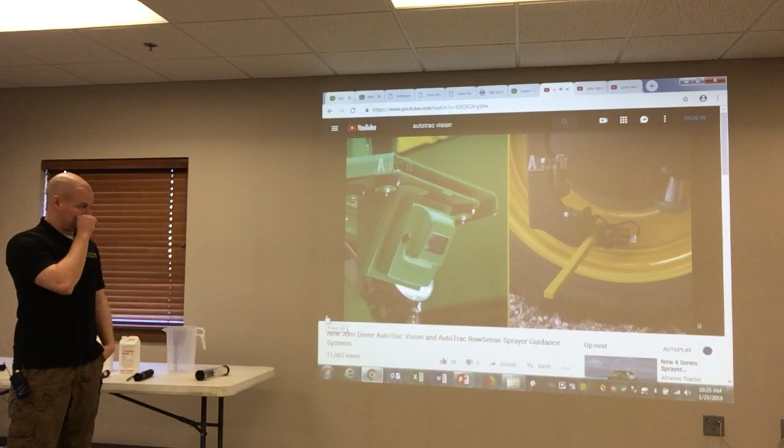Today, we're introducing 2 highly productive additions to the Precision Ag product portfolio: AutoTrac Vision and AutoTrac RowSense guidance solutions for our 4 Series sprayer line. Designed specifically for post-emerge row crops, these new guidance systems allow operators to drive faster compared to manual steering in straight rows. Just by increasing spray speeds by 3 to 4 miles per hour, an ag service provider could add up to $1,200 in revenue per day. That's because AutoTrac hands-free steering helps the sprayer stay on track without taking out plants or wearing out your operator. In fact, we've taken all the advantages you already appreciate and further optimized this popular guidance product for use in post-emerge row crops, including corn, soybeans, and cotton. Our industry-exclusive AutoTrac Vision system uses a frame-mounted camera to see early season crop rows.

With a paddle sensor mounted on the sprayer's front wheels, AutoTrac RowSense can feel the corn stalks in late season rows. Both systems send these input adjustments to AutoTrac, helping the sprayer wheel stay in the center of the row, preventing crop damage.

Operators can have confidence in AutoTrac when following standing row crops, even if planter drift causes misalignment or the AB line from planting isn't available at spraying. Best of all, this industry-leading technology helps boost productivity with faster possible operating speeds and by reducing operator fatigue from manual steering in straight rows.

What's more, these post-emerge row crop guidance solutions help sprayer operators of all experience levels do a higher quality job because they can concentrate on other critical tasks besides steering. Let's further explore how you can improve productivity and quality for your operation.

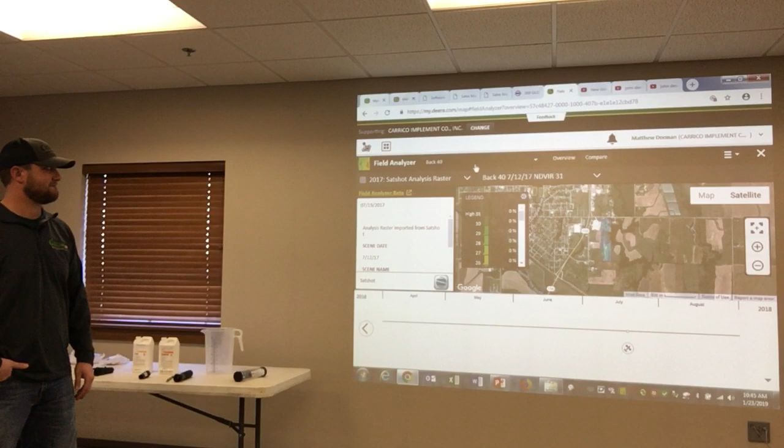So like Connor said, I know this is not the first time you've heard us talk about data or Operations Center or anything like that. And it won't be the last time either, because we feel, we know, we see the product of what happens if you follow through with recording some of this data and use it. What is usable data? To different people, that means different things.

It depends on where you want to go with your operation, what your plans are as far as if you want to use the technology or equipment you've already purchased to the full extent, or you just like some of the creature comforts of it, some of the things that make your life easier. That's fine.

But our job is to make you aware of what your equipment is capable of. And some people don't understand what all it's capable of that you've already paid for.

So we talked to you about harvest data and what you can do with the yield map going forward, make a variable rate prescription for your fertilizer, for your seed, stuff like that. So that's one aspect of it.

Your planting data, your seed guy is going to want you to record, because they want to be able to look back and see what populations you planted, what varieties in certain areas when they go out. Maybe it's your seed guy, maybe it's your agronomist. But we're here for a sprayer clinic, and I want to talk to you about a different aspect of documentation.

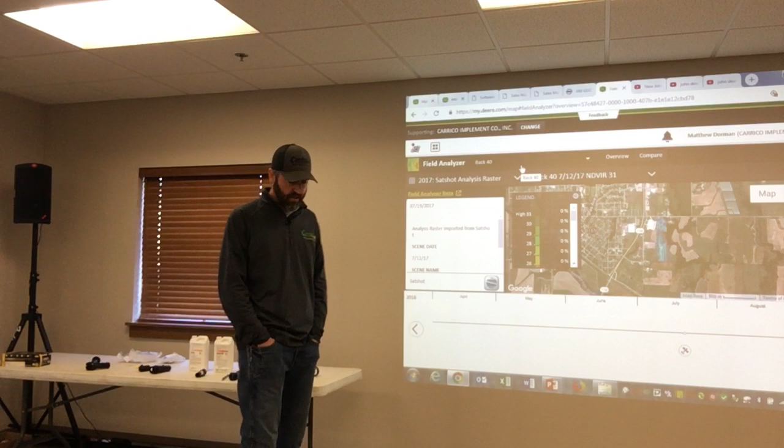This is strictly just to hold your data, share it with who you want to, and analyze whatever you have recorded. JD Link is on sale for $200 with the subscription for a little while. We also have a 4G MTG, the cellular modem in your sprayer, combine, or tractor that sends this data out. There's a deal right now where you can upgrade to a 4G for about $400, and that includes a year subscription. So you get a new MTG and a subscription.

A lot of you guys may be running around with equipment that has 2G modems. Those don't work anymore. 3G still works, but there's a timeline on those. So if you want to talk about getting out of that, instead of putting a subscription on that one, you could just upgrade to a 4G, which comes with a year subscription. There's many ways we can do it. If you have questions, please ask.

I might touch on something real quick. He was talking about FieldView. If you guys are using FieldView and plan to continue, but want that data in a different place, you can make a connection between your FieldView and your Operations Center. So when you're bringing data in through FieldView, it'll automatically go to Operations Center. That way, in the future, if something happens and maybe you stop using FieldView but want that past data, it'll be in your My John Deere account. So you can use both simultaneously.

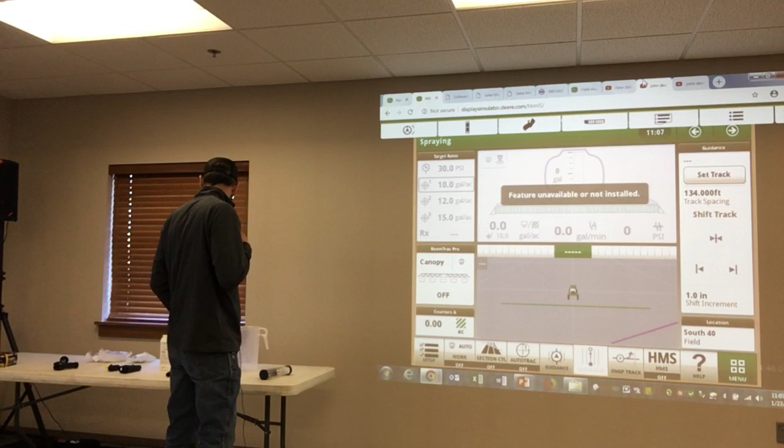What else we got? Oh yeah, I've got a video of that too, the very last one I believe. I don't want to steal the parts guy's thunder, but I like this thing. This is a John Deere Express boom. It goes on the end of each boom section, and I'll show you a quick little video here. The second one down.

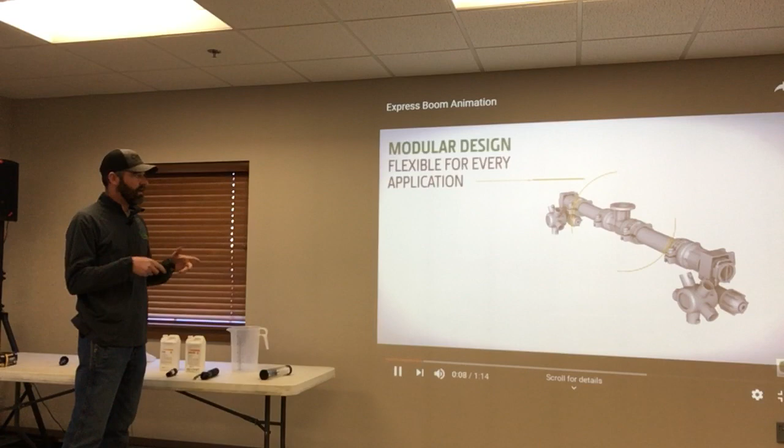Full page, yeah, it's okay, just let it run. Yeah, just X out and start over. There you go. Like I said, they'll go into detail about how to get it, what it costs, or the kit that it comes with.

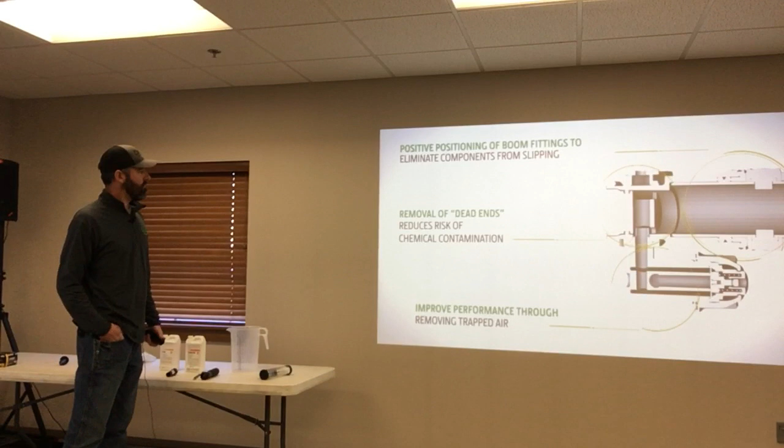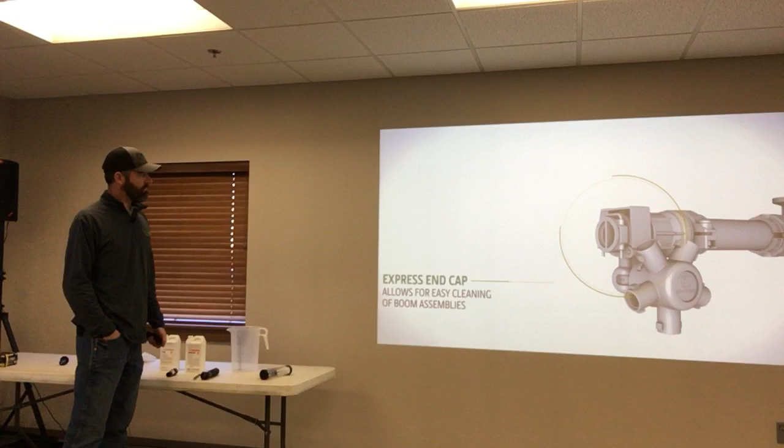So they didn't, I thought I was going to show the different part of the animation, but what I want to show you is, we don't need to watch that yet. So the end of this boom cap is very easy to come off, and you can clean out that way. Or they'll show you there's a valve that you can just twist and clean out. But the air vent on this is what I was really interested and excited about for you guys.

If you're not familiar with it or you don't currently have them, one problem we have with our booms when we're out spraying is air pressure buildup and relieving of that air pressure when we shut the boom off. When we come to the end of the field and the boom is commanded to shut off, the valves shut off, but you keep spraying because there's above 12 pounds of pressure on them boom sections. Your orifice, your shut off, your diaphragm I should say, in each nozzle body is 12 pounds. As long as you're above 12 pounds, it's going to keep spraying.

So then I get this call that says, my boom shut off on the screen, I'm turning, I'm swinging out over this whatever, you know, and I'm still spraying. It's got to be my section control.

A lot of times it's not section control timing. A lot of times it's excess pressure in that boom. And without being able to bleed that pressure off, your boom's going to continue to have that excess pressure and it's going to keep spraying.